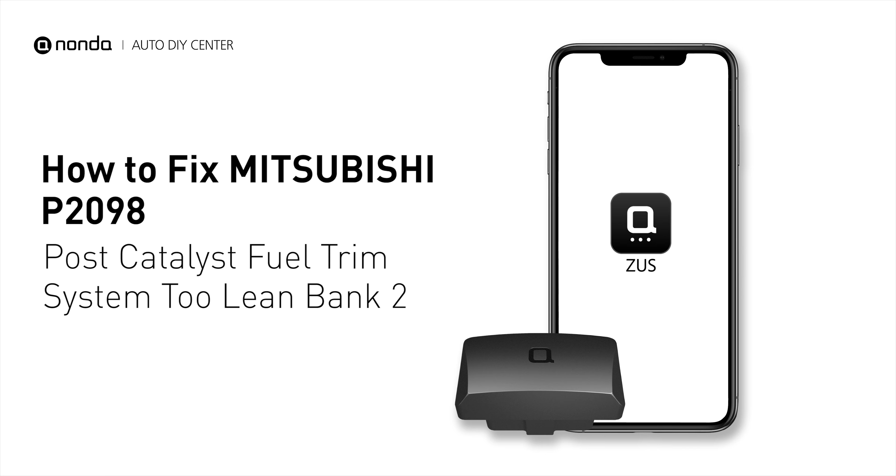This P2098 repairing video is dedicated to Mitsubishi's drivers. If your Mitsubishi is getting a P2098 error code, this video is going to show you 2 practical solutions to fix the error code at home.

Use the ZUS app to scan your vehicle and see the error code P2098. It indicates the Powertrain Control Module perceives a lean fuel-to-air mixture downstream of the Catalytic Converter.

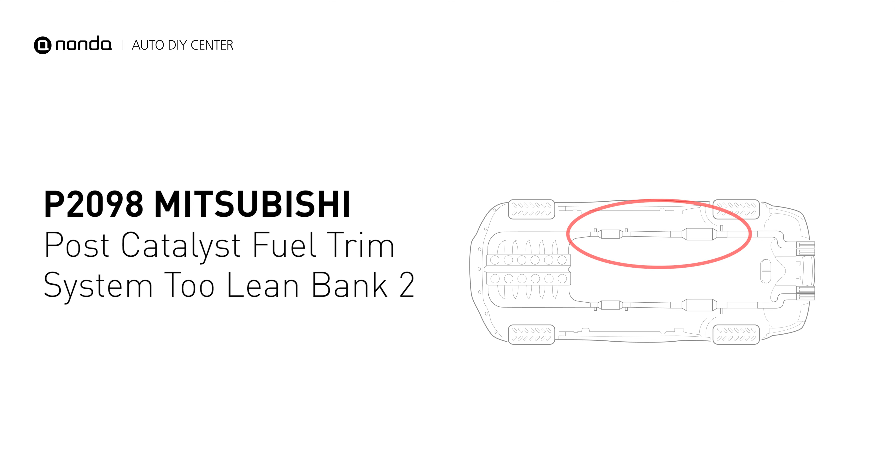Here are 2 of the most practical solutions to fix Mitsubishi's P2098 error code. Method A: exhaust leaks. The exhaust system begins at the engine combustion chambers and runs along the undercarriage of the vehicle, eventually ending with the visible tailpipe.

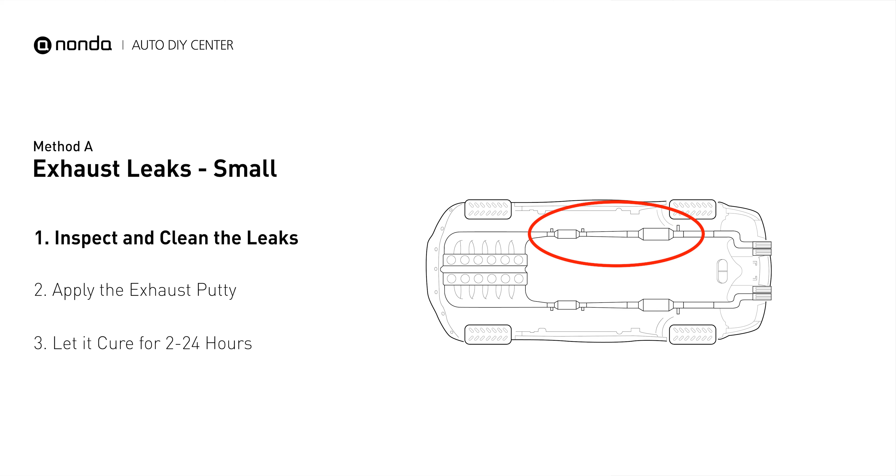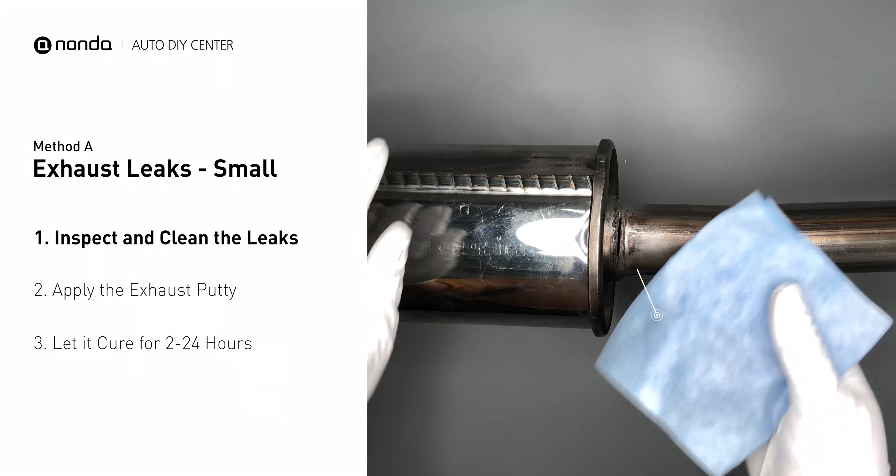If you have a small leak around the corner, get some exhaust putty to seal it up. First, get sandpaper and a wet wipe to clean the leaking area for better application. Stir the paste well to activate it. Apply and press the paste to seal the leaking area.

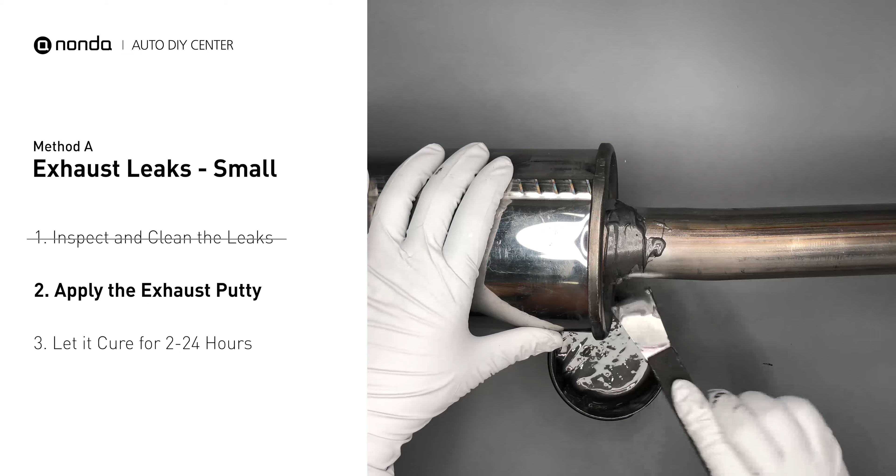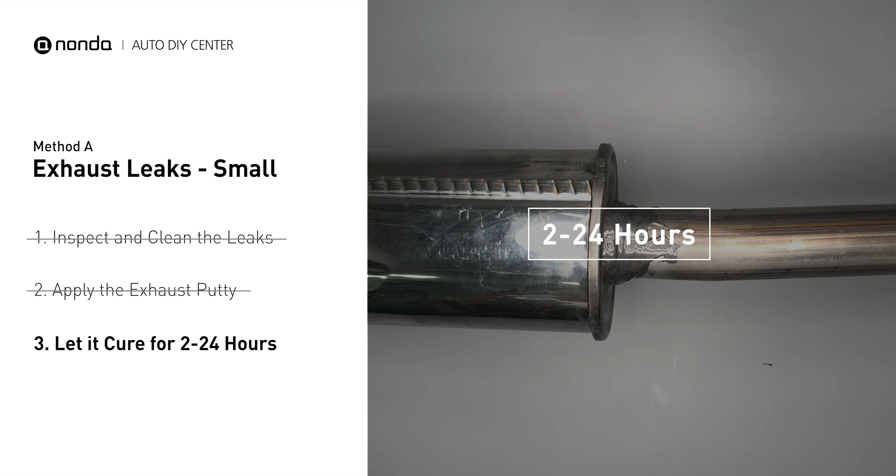After the application, don't start the engine because the positive pressure from the exhaust will blow out the paste. Let it cure for 2 to 24 hours, depending on the external temperature. The hotter it is, the quicker it will cure. That means you can use something like a hairdryer to heat it up and make it cure faster.

Exhaust pipes are made out of rolled steel, and there is a welded seam on it. Like this one, the seam will often rot and create a large leak. First, get sandpaper and a wet wipe to clean the leaking area for better application.

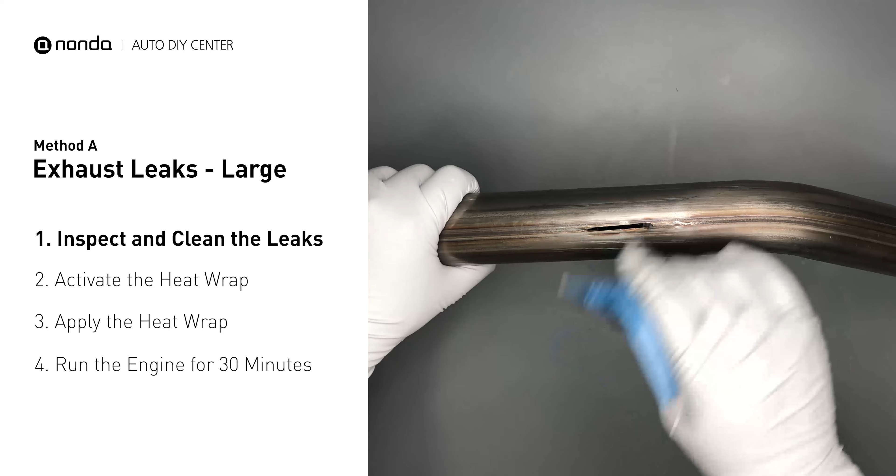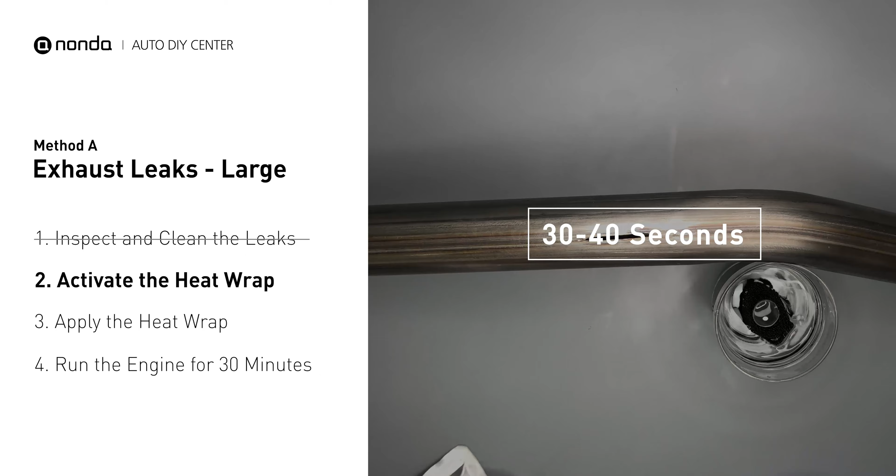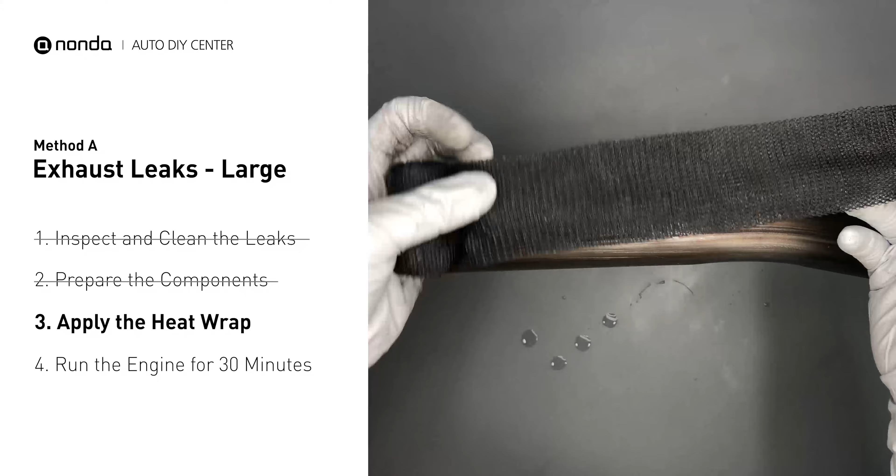Get the heat wrap out and put it in the water for about 30 to 40 seconds to start the activation process. Then, remove it and squeeze out any excess water. Wrap it around the area and overlap it a couple of inches on each side. Repeat the process 3 or 4 times. Then squeeze it to make the resin go all through it.

Start the car and let it run for 30 minutes so the heat cures it and makes a permanent fix.

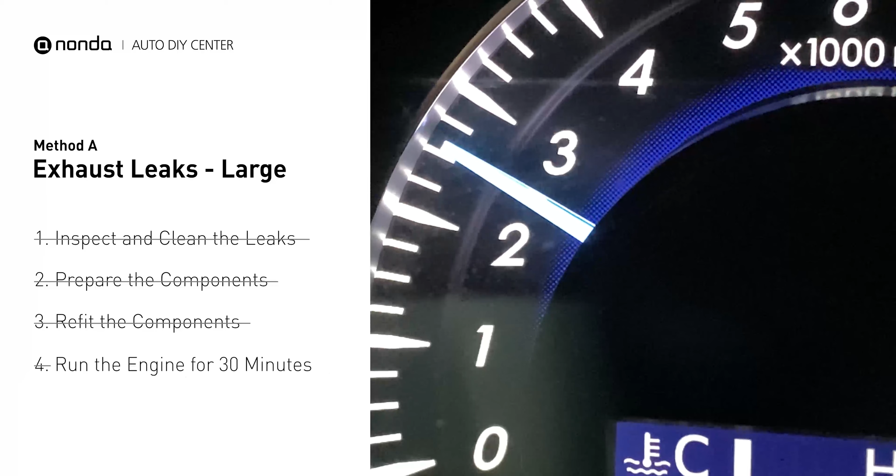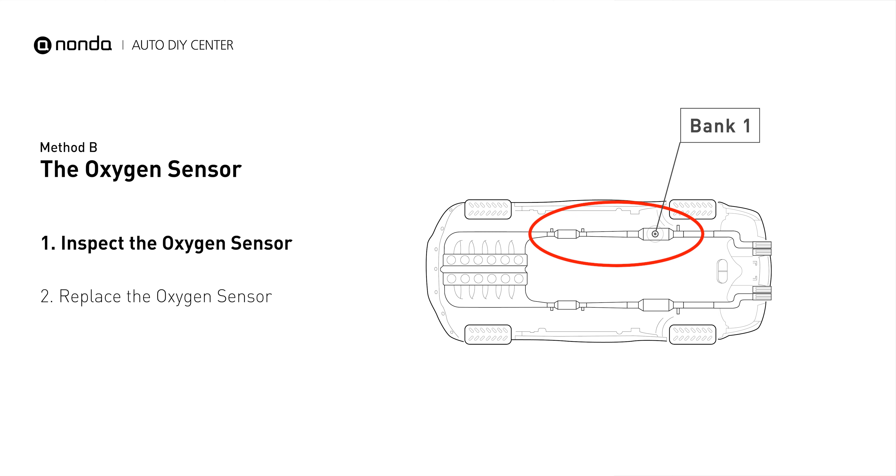Method B: the oxygen sensors. The oxygen sensors are located before and after the catalytic converter. Bank 1 is on the side with cylinder number 1.

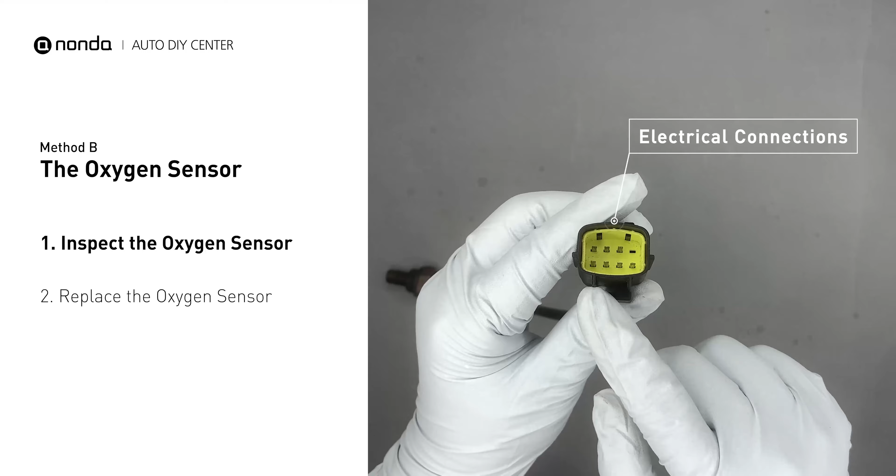Visually check the oxygen sensor's electrical connections, wire harness, and metal tabs for any damages. If damages are found, replace the oxygen sensors.

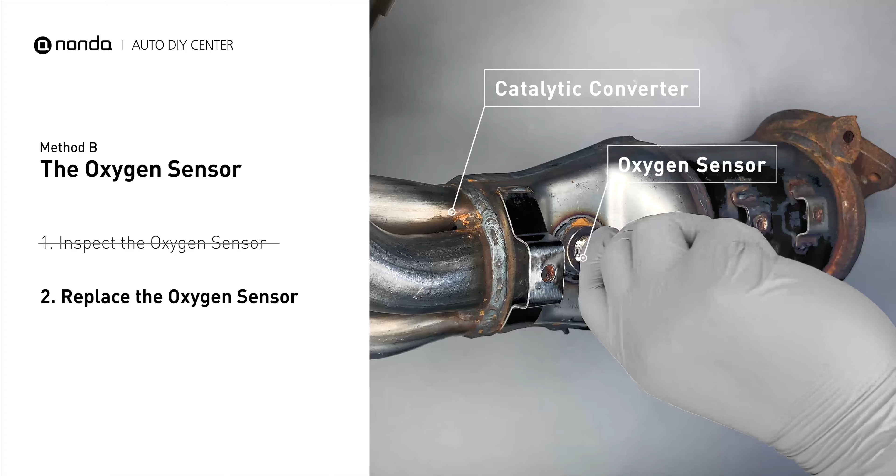So here are 2 of the most practical solutions to fix Mitsubishi's P2098 error code. Tap the rescan button one more time to make sure everything is fine with your vehicle.